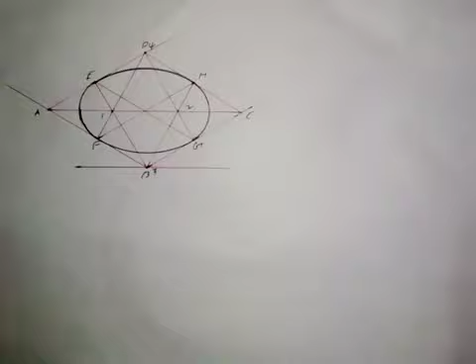So as I said, I want to transform this into an isometric cylinder. What you need to know is the height of the cylinder, and the diameter of the isometric circle is still 50 millimeters as we have done before. The height of the isometric cylinder is 70 millimeters. So from point B here on the isometric square, we draw a vertical line.

We draw a vertical line down here, and this line is not straight, so I'll just take it again. Then we come to this point here, point C. We also draw a vertical line. Then we come to point A here. We draw a vertical line like this.

Okay, so I will now take a measurement of 70 millimeters on this line. I can take it here, anywhere that I like. So I just take 70 millimeters here. So this is 70. Then I'm going to transfer this point to the other lines. So I'll transfer this here, then I will also transfer it here like this.

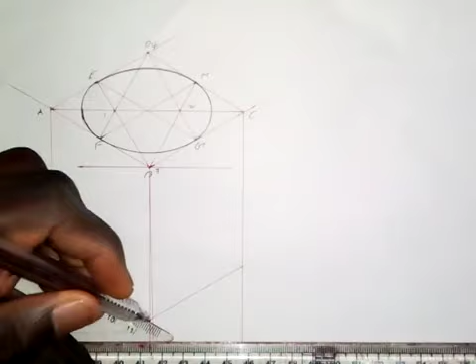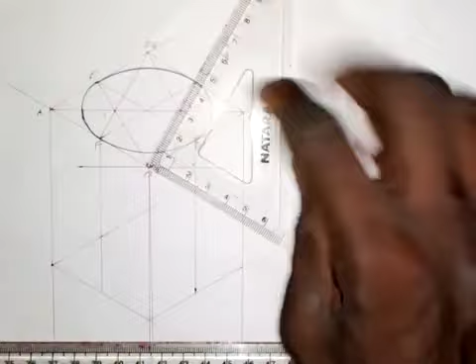Then I'm going to bring down this midpoint where we have this G, because we have to locate this midpoint also here. I'll also bring this one down here. All right, so I will need to complete this down square. I will complete it partially, though I'm not going to use everything. Then I will also complete this one partially like this.

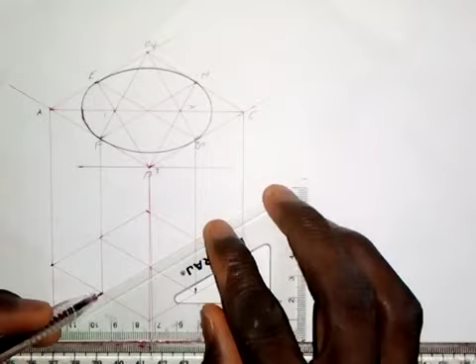The next thing I'm going to do is to transfer the midpoint. I will transfer this midpoint here to the other side. Also this midpoint here, I will transfer it to the other side. So if I'm to label this, this is point A, so let me call it A prime. This is point B prime, as we have AB up there. This is point C prime. This is point D prime.

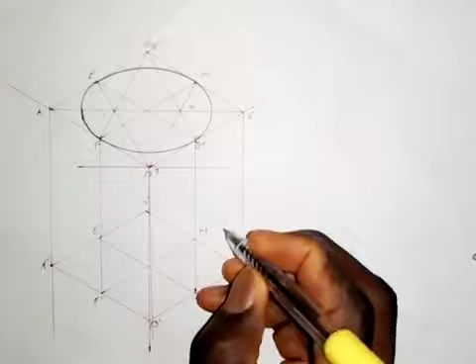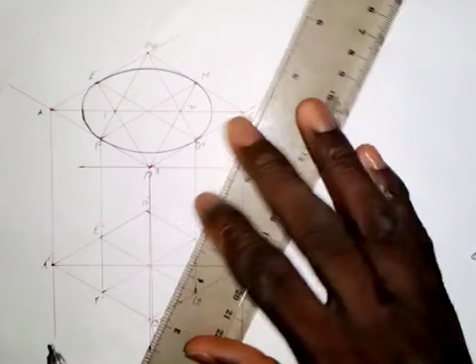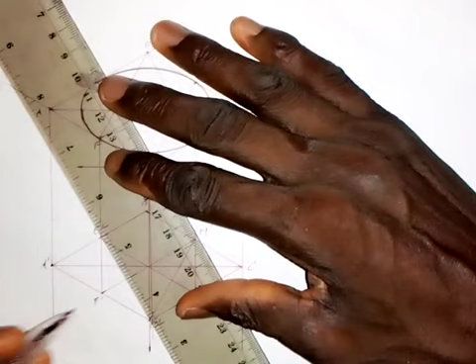This is point E prime, F prime, G prime, and H prime, to differentiate them from the ones we have up there. The next thing, as we have done before, is to join the longest diagonal, diagonal AC. Then from B, I'm going to join B prime H prime together, then B prime E prime together.

Now for the centers we are going to use, I don't have to do that of D with F prime and G prime. We already have these points. This is center 1 and this is center 2 here. This is what we are going to make use of.

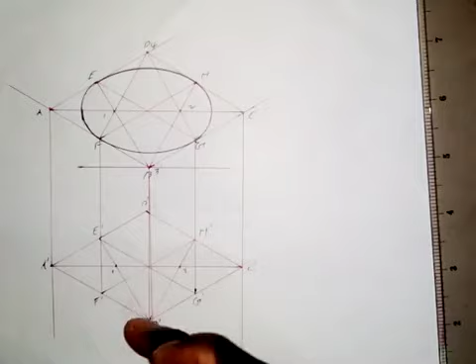The next thing is to take my compass, and I'm not going to draw everything as I drew here. For the base of the cylinder, it's only the part facing me that we have to produce its curve. So it's going to be half, from this point to this point. That's what we are going to produce for the base of the cylinder.

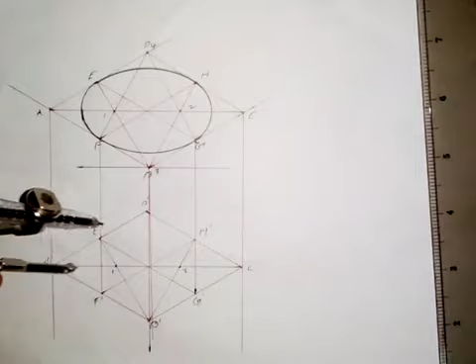So I put the pinpoint of my compass at center 1 here and extend it to F. Then I draw a curve meeting the diagonal here. This is where it will stop. Then I come to center 2 and do the same thing. I will also stop it on the longest diagonal.

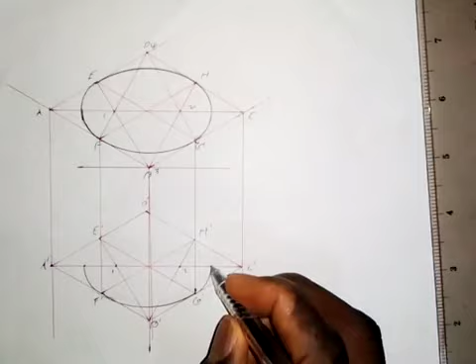The next thing is to join this point on the longest diagonal and this point on the longest diagonal together, like this. Also this point on the longest diagonal and this point, we join them together. So this is it.

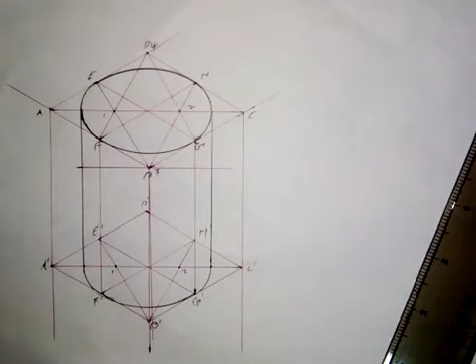So you can see now we have the isometric cylinder in place, as simple as I've shown it here. All you need to do is to practice.